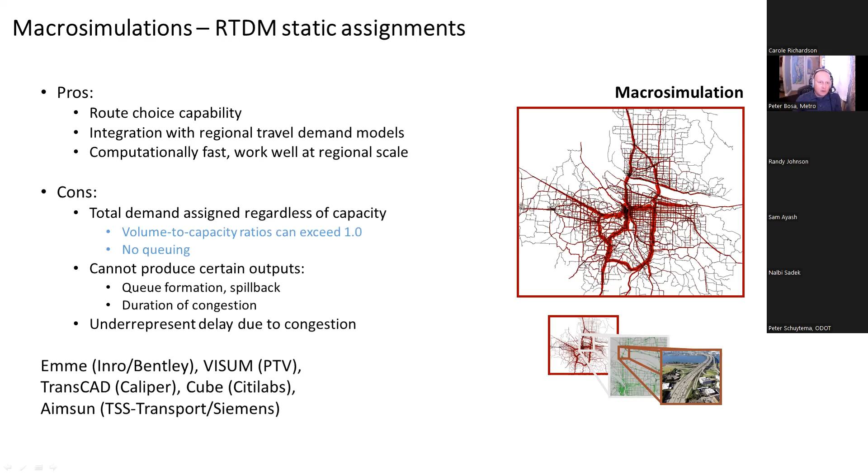At the other end of the spectrum, you have your micro simulations. These are very precise, highly detailed computer simulations. Often the vehicles are almost like agents, modeled individually. They can be assigned specific driver behavior, and they're being simulated in almost real time, so very small fractions of sometimes even sub-second. They're very time consuming to develop and calibrate, taking a lot of time to make sure they're functioning properly. They're computationally very intensive because you're modeling many more single individual objects.

The vehicle paths are often fixed, not always, but the traditional application is you get a set of vehicle paths from something like a macro assignment, and then those paths are fed into the micro simulation, turned into individual vehicles. Then it's left up to the operator to determine how to deal with situations in which the demand coming out of your macro assignment might exceed the capacity capabilities of your facility. So they can sometimes overestimate the amount of congestion on a facility because there's not really that release valve of alternative routes to look at. I'm speaking in generalities here - I know that Chayton would probably raise his hand and say, oh wait, our tool has ways around that. But this is just kind of in general.

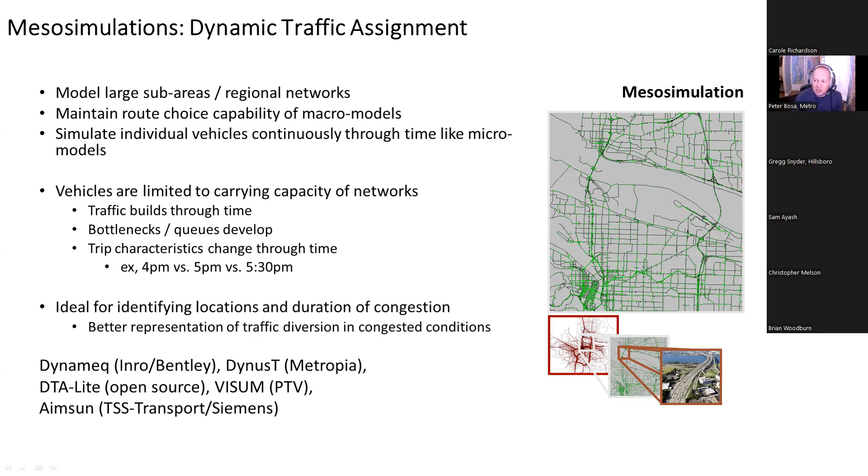And so below is just a list of some of the products that are out there. We've been using Dynameq quite extensively in our region, but I've used all of these other tools that I've listed below, and they all have their advantages. So this isn't by any means a judgment call, it's just that we use Dynameq in our region.

So we've been actively engaged in DTA development here at Metro for over a decade, since about 2010 is when we really got going. We spent a lot of time and resources developing networks, actually all the way down to the lane and intersection level. When we developed our first networks, we were adamant about getting turn pockets correct, turning movements for lane-to-lane turning movements and intersections, the length of turn bays, as much detail as we could possibly get into our large regional networks.

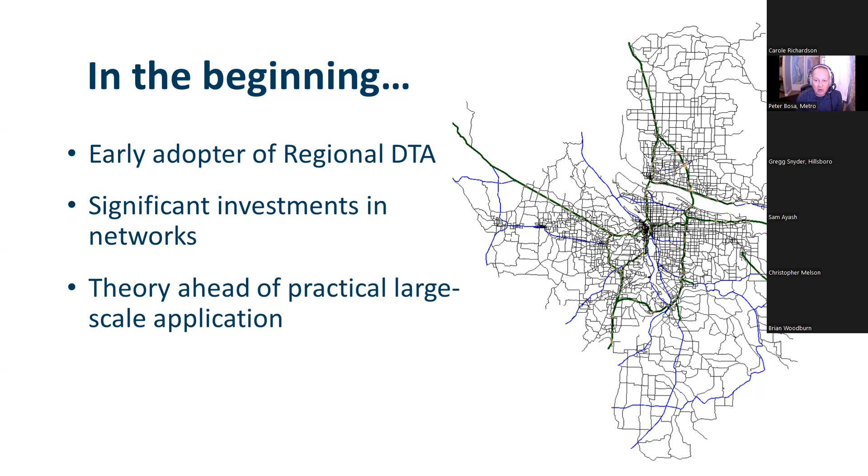Part of this was because there had been this promise for DTA out there for a long time - it's a tool we've wanted to use. Unfortunately, until the last maybe 4 or 5 years, I would say that the promise of DTA exceeded the ability of the tools to function in a manner that was conducive to our planning. So basically what I'm trying to say is that the computational runtimes of these DTAs were significant, and it didn't make them practical to run at a very large scale. There were also some issues behind convergence and all of that, but aside from that, we still found a couple of test cases where we could deploy these tools.

Somebody's unmuted real quick. Okay.

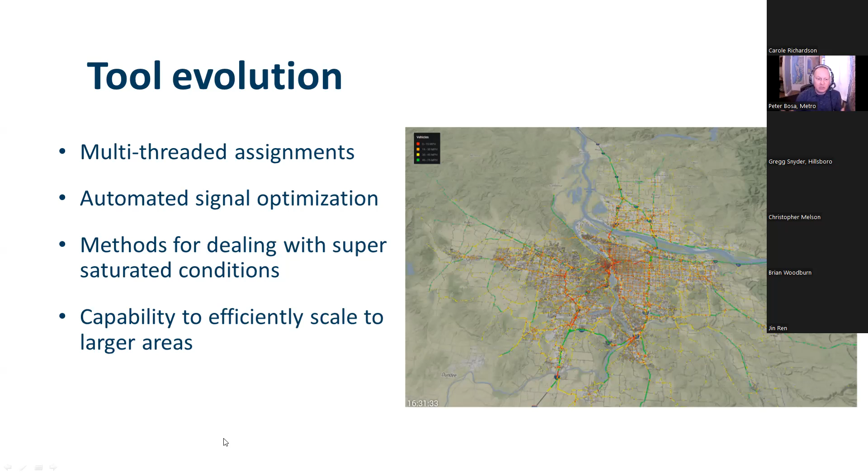Over the last couple of years, our developers have been hard at work. They've improved the assignment capability of their tools. There's multi-threaded assignments now. They took some of the more complicated calibration features like signal optimization and automated those. There's methods now for dealing with supersaturated conditions, so even if your demand exceeds capacity, the tools can massage it in such a way that they can still reach convergence in a relatively reasonable amount of time. And they have the capability now to scale to much larger areas than before.

So we started a project a few years ago trying to figure out the quickest way we could deploy a DTA at a large scale. What are the features that are most important for a DTA? We basically came up with this Quick Launch DTA idea with our friends at INRO, the developers of Dynameq. The whole idea was we wanted to simplify, standardize, and economize - take advantage of repeated applications of our DTA tools. During this project, we learned a couple of key takeaways.

One, it should be at the top: ramp meters are really important across all the tools we've ever tested for DTA. If you want to get your freeways validated well to observable data, you really need your ramp meters in there. They're critical for controlling the flow of traffic onto and off of your freeways.

The presence of signals matters - not a surprise - but the actual timing plans are less important when you're looking at a larger scale. So generic timing plans seem to work fairly well, and you don't have to worry about necessarily getting every signal timing plan correct in your model, which is great.

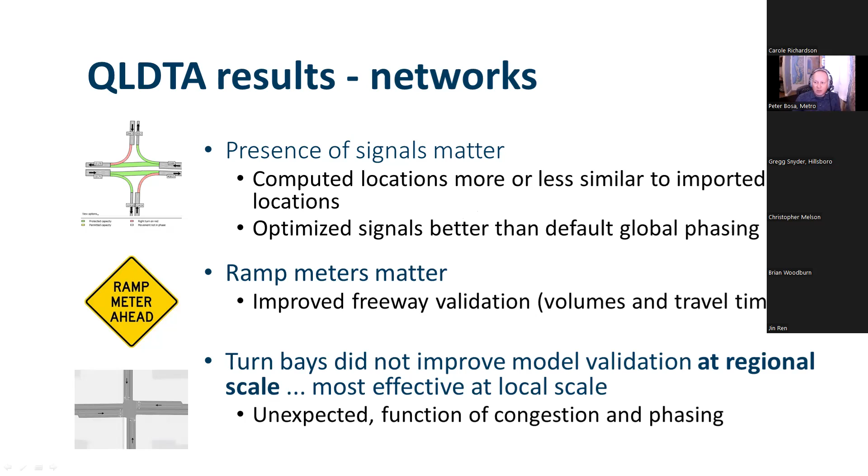We also found that turn-bays didn't really improve our model validation, at least at a higher level. We do have lane-to-lane movements in our model, we do have turn-bay links, but we found that if needed, we could use a tool that basically creates generic turn-bays - standardized, like 100 feet, determine the locations where they should go, put them in. And that seems to work just as well as having an actual representative network, a real-life representative network.

We also did some work around how do we move from our trip-based model, which produces the trip tables that feed the DTA, into the DTA. Our trip-based model is run at the regional level. We knew that the DTA, the final applications, would tend to be at a sub-regional level. Does it make sense to go from a regional trip-based model to a sub-regional scale, to take a sub-area cut of those networks and then move those into DTA?

Or does it make sense to take your regional trip tables, move those to a regional DTA, and then use that to take our sub-area cut? We basically landed on the latter - go from the regional DTA to a sub-area DTA, and I'll talk about that here in a second.

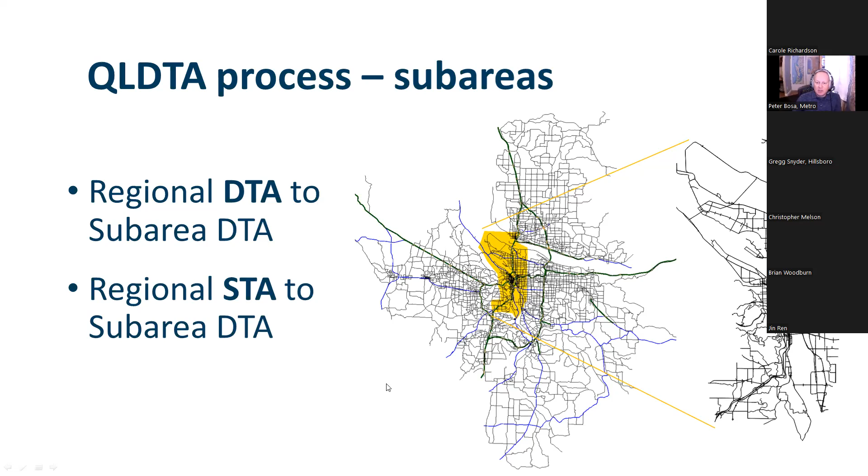So this is an example of an application for the I-205 project. In this project, we start with a regional DTA. We haven't optimized all the signals or anything - we're not too concerned about even validating well at the regional level. Instead, what we're doing is loading all of our static assignment trip tables onto the regional network, and we're just running it to get a capacity constraint on the demand in the network.

This way, when we do our sub-area cut, we know that the demand feeding into the sub-area won't exceed the carrying capacity of the network, and it helps improve our validation of the sub-area later on. There's an efficiency in reducing the demand to the carrying capacity of your network before you start doing your hardcore calibration and validation.

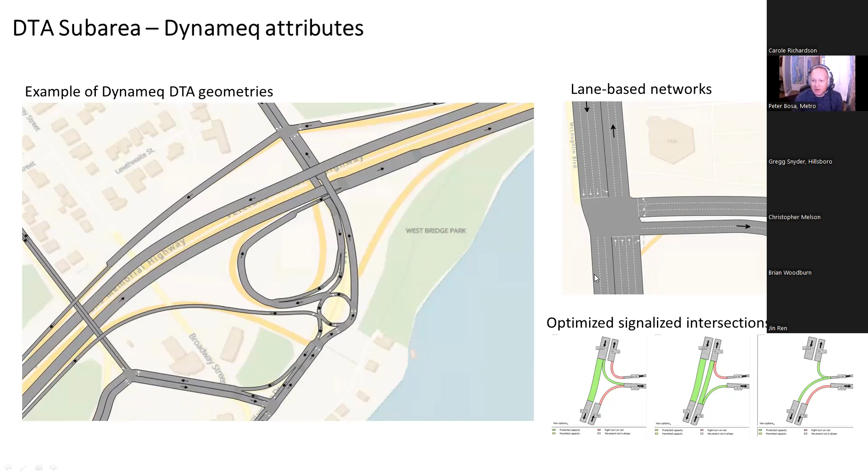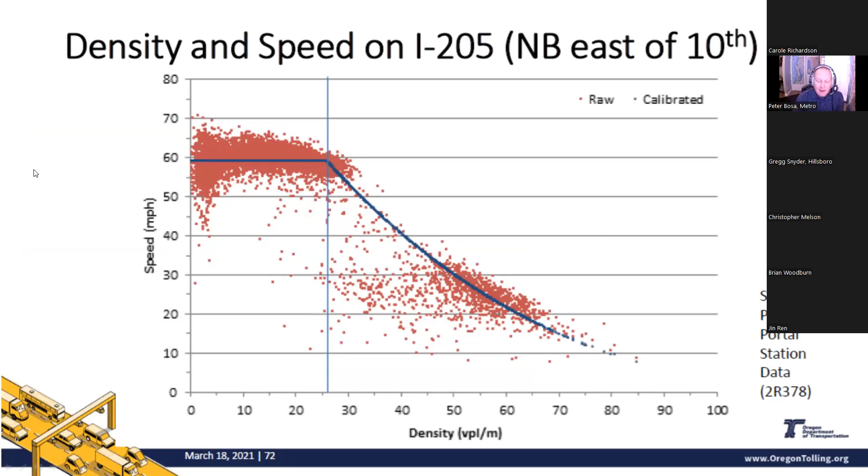Okay, so these next two plots are basically just showing data from portal data on I-205. It shows the relationship between speed and density on your freeway, and volume and speed and flow rate. I put these in here because they show what's happening in real life, and they also show what the DTA is doing. In real life, this is a facility on I-205.

As it fills up with traffic, it can maintain a pretty steady speed up into a certain point. You'll notice our flow rate keeps increasing almost up to 2,000 vehicles per hour per lane, but not quite. I'd say maybe it maxes out at around 1,750, 1,800.

But then we see a huge drop off in speed, and the flow rate starts to decrease. So what's happening here is you're filling up the facility with traffic. Because of that, the congestion is causing friction, slowing vehicles, and as a result, you get less and less vehicles through the corridor.

That's a primary difference between a DTA or micro simulation and your static assignment. The static assignment would show slowing speeds, but your flow would still increase. It doesn't have this ability to decrease flow as your congestion builds. So the DTA is basically capturing this: as you reach a critical mass, your flow rate decreases, your speeds decrease, and that gets represented - we'll see that in a little bit.

So here's some of the characteristics that we tried to validate against. We lifted many of these from the VISSIM protocol that was developed for ODOT, the microsimulation protocol. Because this is a different tool than microsimulation, we're a bit more relaxed, especially when it comes to some of our GEH and other goodness of fit statistics.

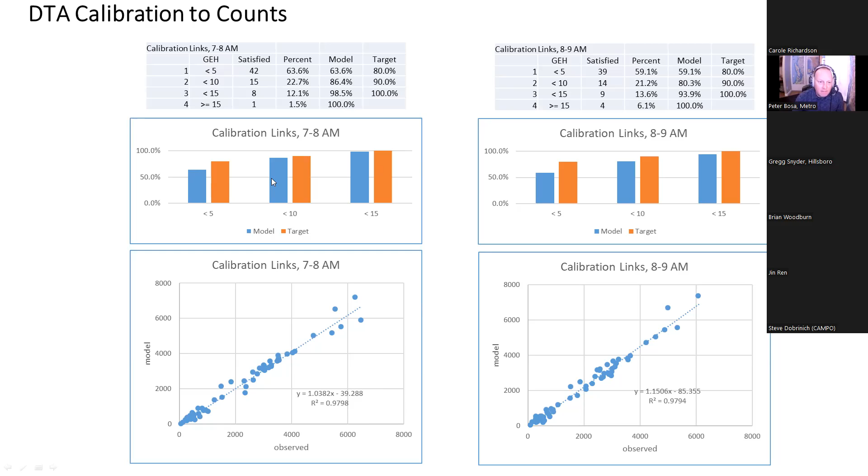But you can see here that we're still trying to go for a pretty good fit, high R squared, low GEHs where possible on counts. The same with the travel time.

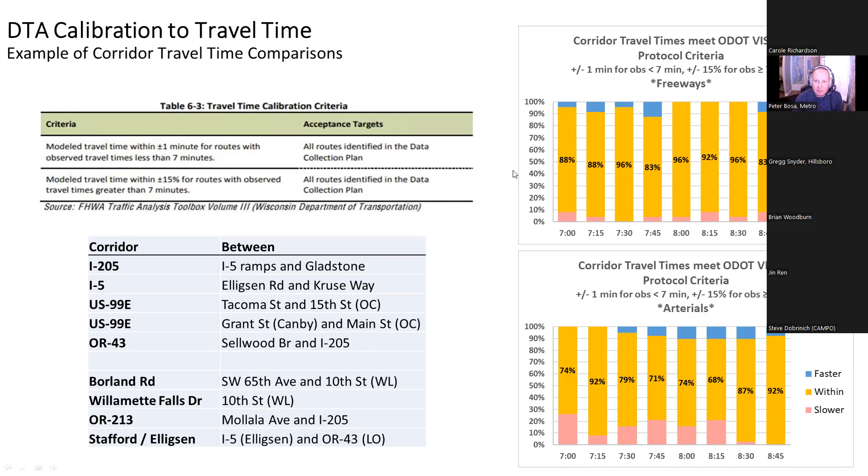This is actually something where we can be a bit more in line with the VISSIM protocols, where we look at the travel time calibration criteria that are set out there. So we try to match the travel times within the DTA to that which we've observed with INRIX or HERE data, and we try to fall within the prescribed ranges - within a minute for travel segments that are 7 minutes or less, and within 15% if it's longer than 7 minutes. Here's an example.

So when we're calibrating our DTA, we're really looking at three things: we're looking at counts, we're looking at travel times, and then we're looking at space-time plots, which show the relationship between speed and volume on your freeway. They're really good at capturing bottleneck locations.

So here, for example, this is I-205 southbound in the AM near the Abernethy Bridge in Oregon City, West Linn. This is the INRIX data. As you can see, as the colors get darker, that means it's slowing. We see a bottleneck occurring right around 7 a.m., extending back almost to 82nd Drive, at least through the 9 a.m. for the AM peak period.

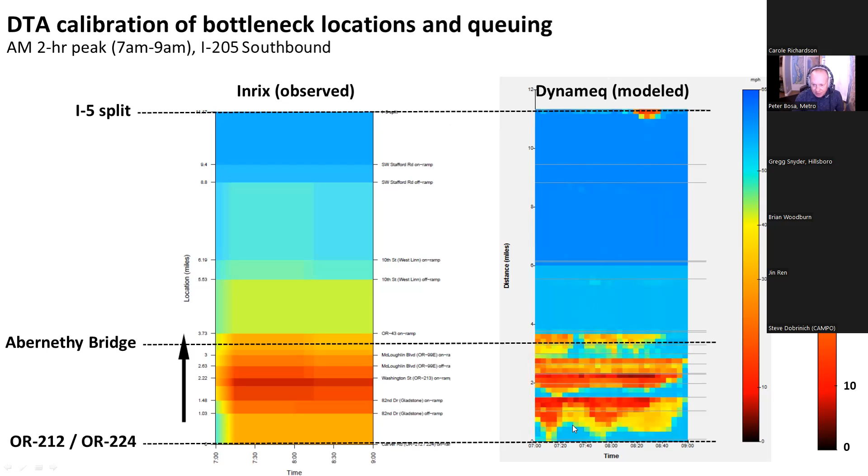We see that here in the dynamic model as well. I think this shows that we've done a pretty good job of calibrating this model so that the bottleneck location is captured, and then the actual shape of the queue spilling back, the extent of the queue, the duration looks very good. This is another example where we feel like the dynamic model is doing the right thing.

And it actually has better resolution than the INRIX data. The INRIX data is much more general, while the dynamic model shows the queue, I think, in higher detail.

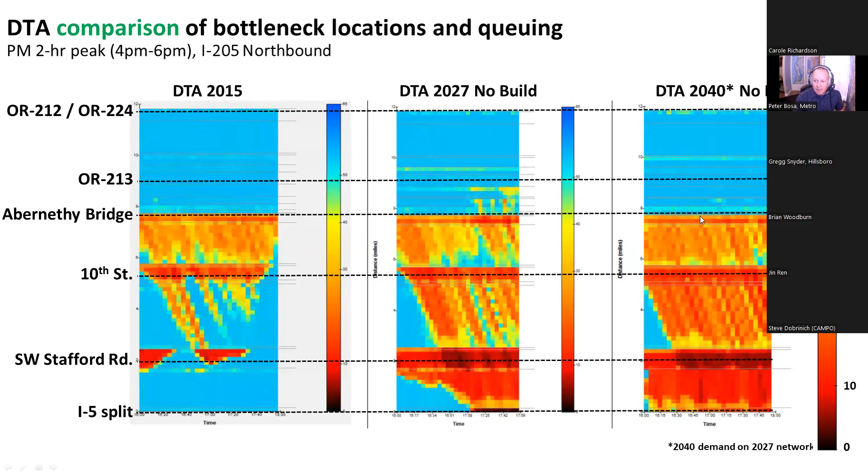And then once you've got your DTA established, you can start doing comparisons. So this is a 2015 base year. We already have congestion at the bridge spilling back in this corridor. By 2027, under a no build scenario, that congestion only gets worse. And by 2040, assuming a no build, we just have complete congestion in this entire corridor.

And here's an example where we have done some analysis with a build scenario. We added capacity in the corridor. As a result, the bottlenecks have been alleviated, and you can see the queuing is gone, with free flow speeds through most of the corridor.

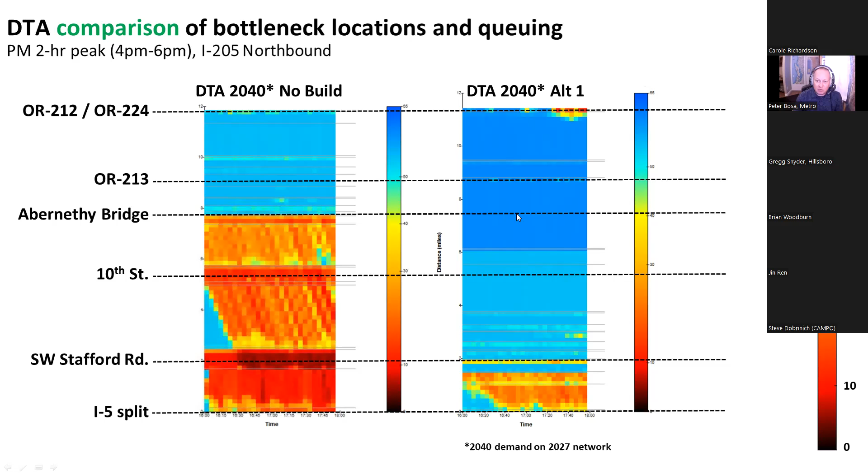If somebody asked me what's the biggest difference between the DTA and static assignment, I would say the biggest differences occur not where you've added capacity and alleviated congestion, but in scenarios where you have a lot of congestion. When there's a lot of congestion, the static assignment will tend to push more vehicles through a corridor and overestimate the speed at which they're traveling.

The DTA, however, is capacity constrained. So what happens in really congested corridors is you get much less throughput. In this example, we're getting about 25% less volume through our no-build scenario.

You can see that our two build scenarios are quite similar between our static assignment and our DTA, because we've added enough capacity that there's no longer bottleneck issues, and both models do a fairly good job modeling that condition. But in the highly congested time period, the DTA is more responsive to congestion. We see much more diversion in our no-build at slower times, longer travel times, slower speeds.

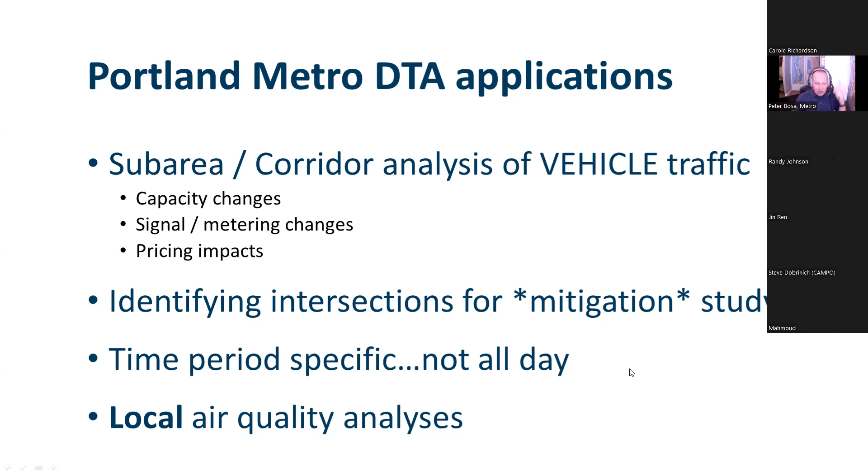Moving into the West Side study we have coming up, we'll be looking at potentially using DTA for local air quality analysis. What we have found right now is it's not practical for full regional implementation. There's no feedback mechanism with the travel demand model, so we're not going to see mode shifts related to the DTA - it's not going to be feeding into that.

There's no transit component to the DTA, so it's more time and resource intensive to establish than our regional travel demand model. There's much more calibration time - it's more akin to a micro simulation than a static assignment when talking about calibration time. You have to calibrate each application of the DTA, and each time period being modeled. This adds time.

And frankly, at the end of the day, this just becomes another tool that supplements the rest of your tools. This is a tool to supplement our regional travel demand model, not replace it.

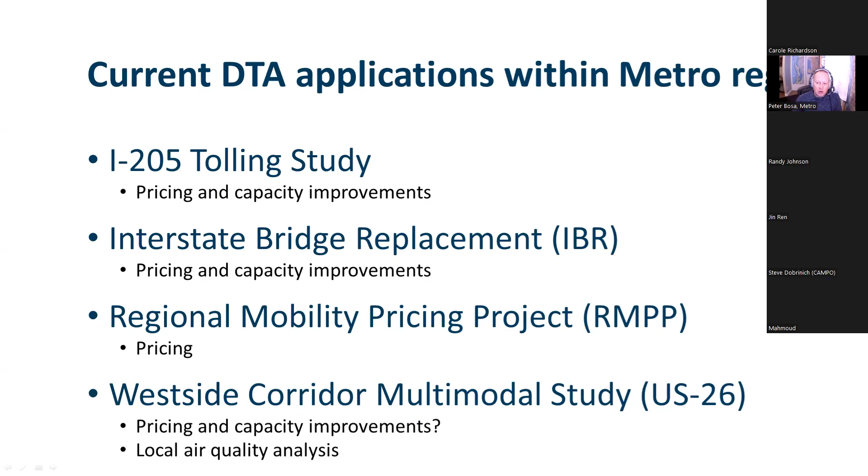A couple of the projects we're using this on: the I-205 study project looking at pricing, the tolling study, the interstate bridge replacement, RMPP - which is a large pricing project - and then the upcoming West Side Corridor multimodal study, which is US 26.

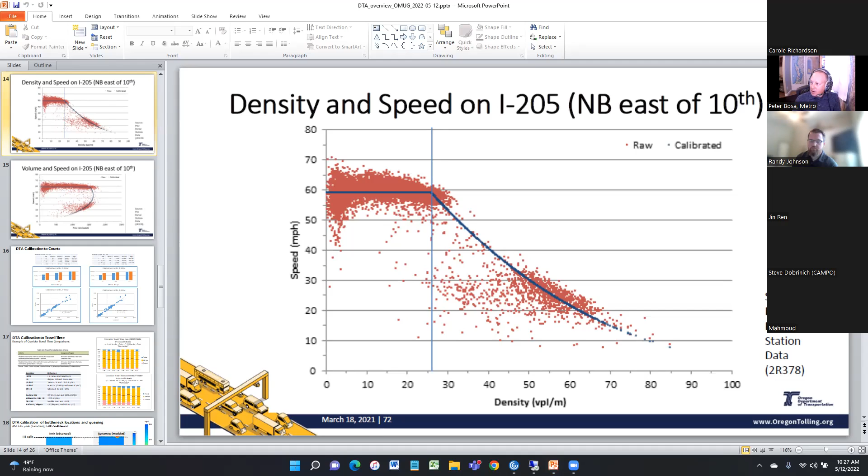Oh, okay, the shape of the speed-flow curve, yeah. So this, I actually have a spreadsheet - that's Peter Bosa's spreadsheet that produced this.

The spreadsheet is excellent because it allows us to look at, section by section, station by station, and create these models. I've found that the flow rates rarely approach 2,000 vehicles per hour per lane, which is the standard flow rate or capacity we use in our models, like on our freeways. After creating these plots for enough portal stations, I think it's safe to say that it's rare to see that type of flow rate in our region. It's led us to reconsider some of the maximum flow rates we'd use, not only in a DTA, but also in our static assignments. I have a spreadsheet that does this stuff - that's a presentation on its own, but it's a very useful tool.

I think that's really important, Peter, and it really goes to show how important local calibration is for these models. We have data down in California showing some of those freeways are pushing 2,200 plus vehicles per hour per lane, so we're certainly not getting that capacity here in the Portland metro region.

Randy asked: do you think that's a geometry issue, a facility issue, or more of a driver behavior issue? I think it's a combination of both. Having driven down there, there's definitely a little more aggression in the driving population than up here. They're not Oregon nice like this, right? Right, I should just label this 'Oregon nice' - lots of space between vehicles.

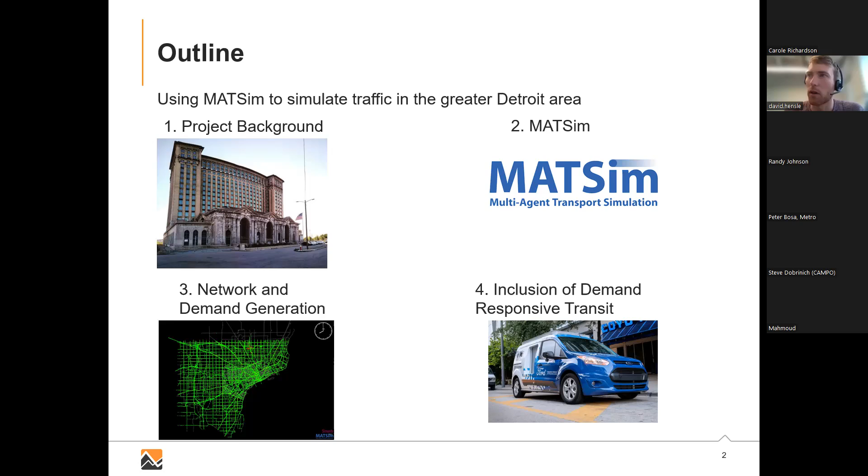The project background: it was a collaborative effort between RSG and ETH Zurich. ETH Zurich is one of the primary developers and users of MatSim, so we leaned on them a lot for MatSim-specific knowledge, and RSG was primarily responsible for a lot of the network and demand development.

The project essentially started with this new, or old, building in the Corktown region of Detroit, just outside downtown. Ford Motors bought this historic building, the Michigan Central Station, a couple of years ago. The idea was to turn this decrepit old historic train station, which used to be the jewel of the community but has since been run down, into a brand new office focusing on autonomous vehicles and Ford's administrative offices. They wanted to understand the impact of adding 5,000 workers or so to this area and how it would affect traffic around the region, and also explore new mobility options like this Uber pooling type service, with an eye towards more autonomous vehicles and ride sharing.

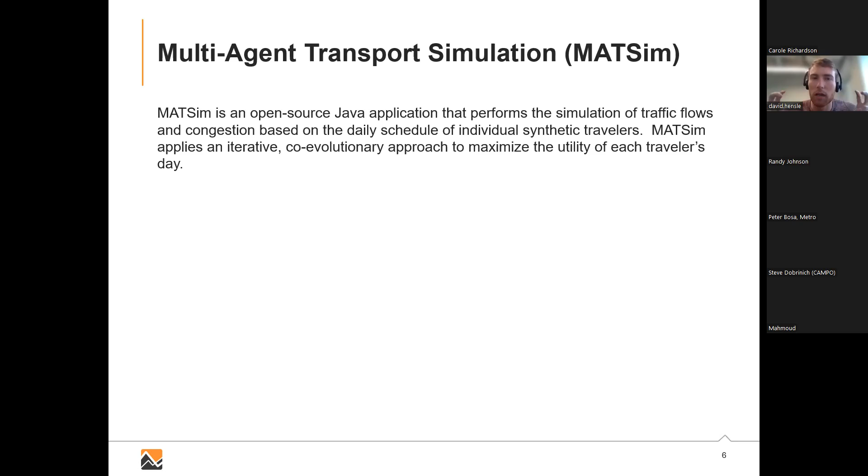Then there's some scoring function that determines how quickly or how well an agent goes from their origin to their destination. Generally, MatSim has the ability to change people's daily patterns to try to reach convergence with a co-evolutionary approach. We didn't really want to allow people to change where they were going or when they were going there. We did allow people to change the route, how they got there, and the mode, what they used to get there. So there's a scoring function, which we limited in this instance, and then there's this replanning loop that comes back, and you run this until you reach some convergence.

And then, of course, we want to do output analysis like traffic volumes and mode choice distribution, things like that.

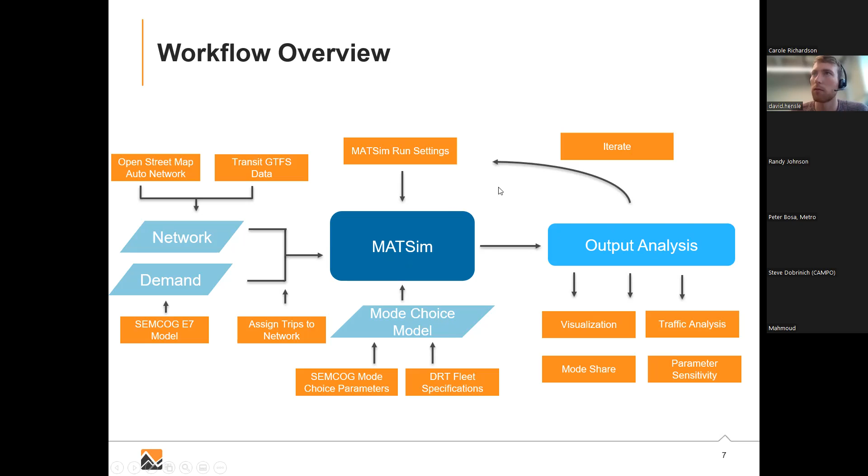So moving on to the demand and network creation. The demand, as I just mentioned, came from the region's trip-based travel demand model, the Southeast Michigan Council of Governments, which is the MPO for this big 7-county region. There's almost 3,000 TAZs in this area, corresponding to 21 million person trips.

We were really only concerned about this Wayne County modeling region here. So that essentially trimmed it down to only about 11.7 million individual MatSim agents. And we distributed them temporally and spatially from the SEMCOG trip-based model onto our MatSim network.

I think it's important to note here that we use the SEMCOG travel demand model because it's already a calibrated and validated model. We didn't really want to try to create a travel demand model from scratch for this whole project. So the idea is to use something that's already been created and used and validated, and that it could be a little bit more easily replicable to other regions that have similar trip-based models.

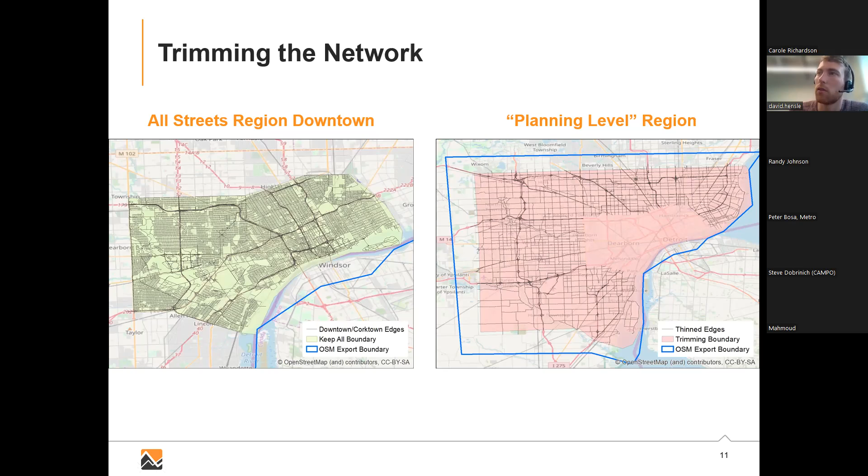And then what we did was we took the SEMCOG planning level network and we trimmed out all the auxiliary streets outside of the downtown region to avoid unnecessary computation time.

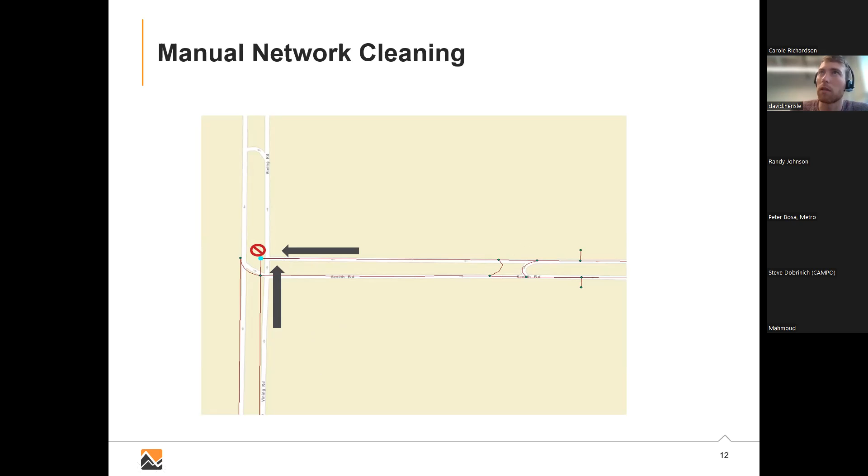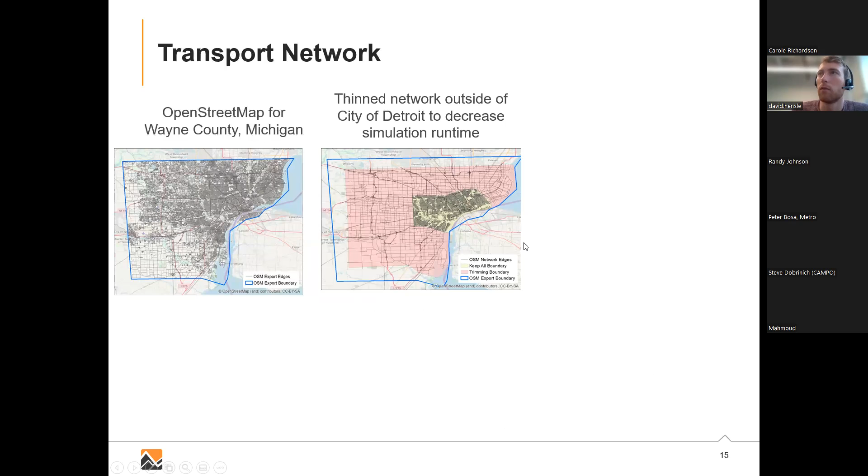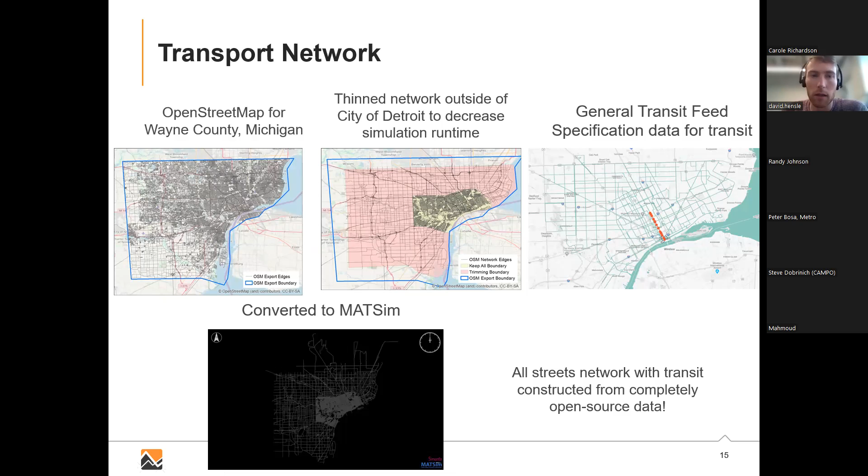So to summarize here, we started with OpenStreetMap for Wayne County. We trimmed it, added some transit to the network, and then converted it into a MatSim format. And we were able to do all of this with open source data and open source tools, which I think is pretty cool.

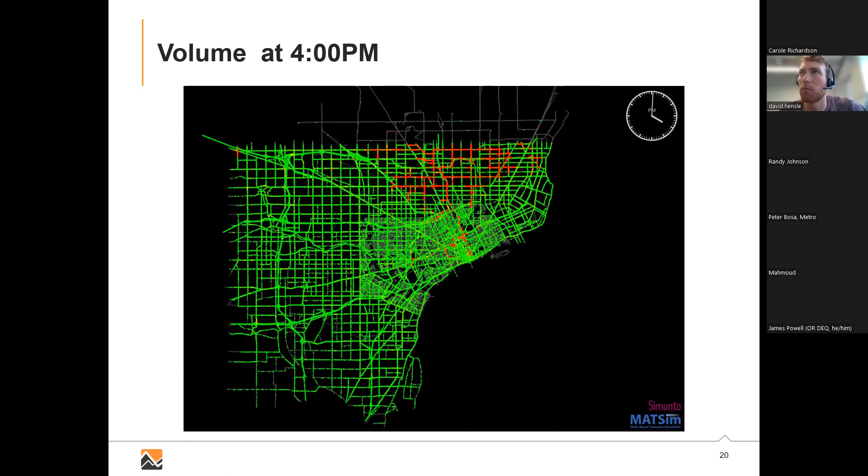And as you zoom through the day, 8 a.m. to 10 a.m., it grows. And then by 1:30, it really grows. And then by the time you're in the PM peak period, it's really spread, and it doesn't get any better by the time 6 o'clock rolls around.

So what this really leads us to is there's generally regions in your development cycle where you have network problems. For example, there's this interchange right here, 8 Mile Road and I-75. And there's this little link, like this one right here, in the network.

In reality, it's 2 lanes, kind of this split lane deal, but it was coded as 1 lane from OpenStreetMap. So here's an example where people are coming off the highway or trying to get on the highway, and this one small tiny little lane backs up, which causes a backup onto the highway, and it just spreads throughout the day. So very small problems in your network can really cause headaches when you're doing scales like this.

So after we sorted out a bunch of those issues, we were able to look more at the demand responsive transit portion. The way that we incorporated this was by using a mode choice model. So we have our usual car mode, some non-motorized modes, and public transit, and then we added an additional demand responsive transit mode here.

The parameters for this mode choice model came from the SEMCOG trip-based model. They include things like in-vehicle time, out-of-vehicle time if you're doing things like walk to transit, walking or biking. We also have some travel costs, auto operating costs or toll costs, and utility terms based on household income and the availability of a vehicle for the household the agent comes from.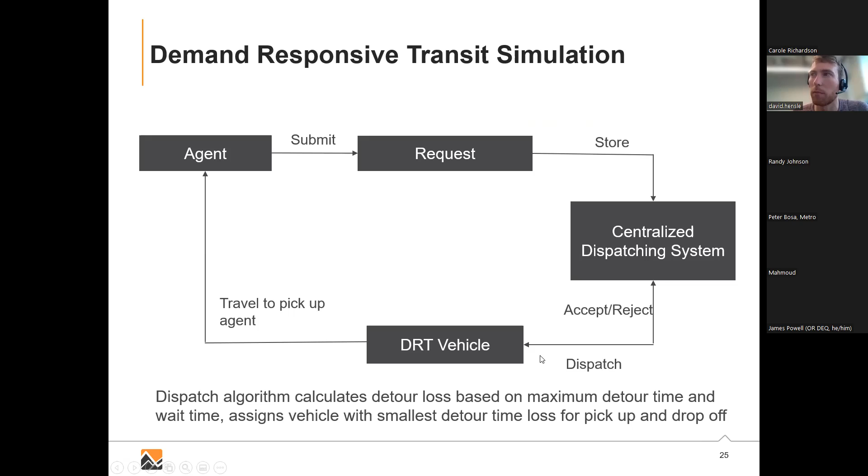So we tried a bunch of different scenarios: multiple different fleets, multiple different vehicle occupancies, the size of the DRT vehicle, and two different fares, $2 and $4, just a flat fare with no distance scaling. We fixed it so the customer was only allowed to wait 15 minutes; if they had to wait more, their request was rejected. If there was more than a 15-minute detour time for the vehicle, it wasn't allowed to pick them up or drop them off. There was also an additional almost 2-minute wait time at each stop.

So as we go through our simulations, these plots show the number of travelers, the number of people who requested rides, and the number of vehicles in the fleet, with two colors: the $2 fare is blue and the $4 fare is gray. The lines up here are the total requests. For a fleet of 100 vehicles, there are 35,000 requests, but only 5,000 people actually got served, so the rejection rate is extremely high.

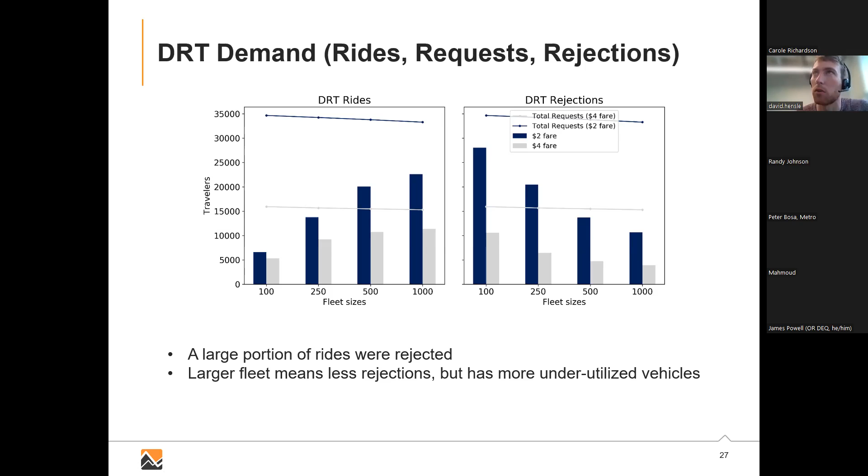Also, as a function of the low density in the Wayne County region, the occupancy for these vehicle rides was pretty low. You can see the amount of deadheading of these vehicles here. Most of the passenger distance is with one passenger in the vehicle, with very small amounts of ride sharing with two, and four is pretty much non-existent. There are a couple cases where a few vehicles had up to 3 people in them.

We also took a look at wait time, specifically the average wait time of the fleet. It's not very sensitive to fare, but it is, of course, sensitive to the size of the fleet. As the size of the fleet goes down, the wait time goes up, because the density of vehicles on the network that can pick up and drop you off decreases.

To summarize, most of the DRT trip ridership comes from the car mode share. That's where we saw a huge shift, people switching from car to this DRT mode. That's probably not surprising, considering most people in the Detroit region use cars anyway. It's a very low transit share area.

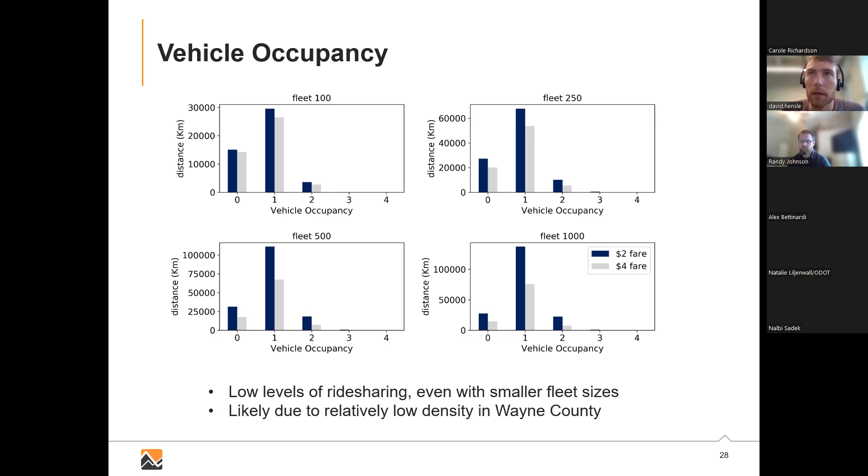I don't know, yeah, so that was kind of the point I was making about it being cool to integrate this with the regional travel demand model. If this becomes a mode and there's more available and people are willing to take it, does that mean less people are going to own cars? That's not something that was explored as part of this project, if that answers your question.

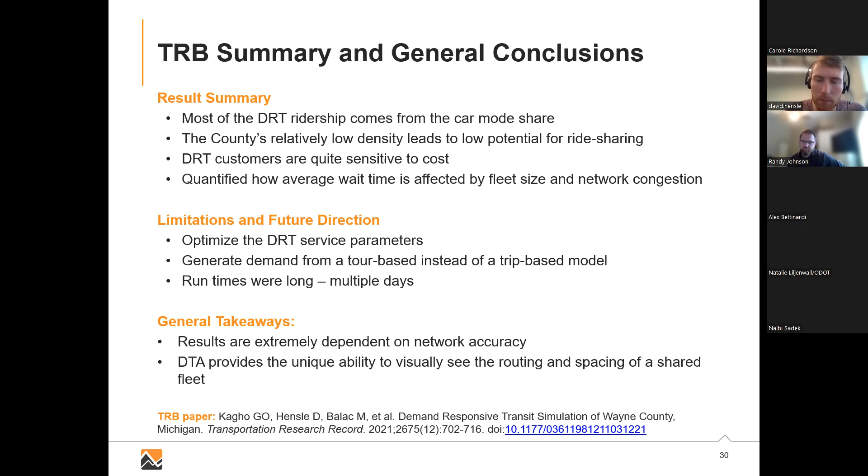Sure, but was the demand—that makes sense. So the ownership is somewhat static, but was the amount of shifting to this new mode a function of... was there a variable tested in how much the ride costs the chooser?

Yeah, right, so that's this fare cost here. If you look at the mode choice model, this travel cost—the fare would come into this travel cost if you're in the demand responsive transit portion, or if you're in public transit, it'd be the fare of the transit vehicle. Or if you're in a car, we have some auto operating cost parameter that comes in there as well.

Got it, thanks, I just missed the slide. Thanks so much. Okay, and then final question here before we jump to the next presentation from Peter Bosa.

Did you validate the MATSim all-day network results with observable data? Yeah, so we took the counts that were from the SEMCOG model, or the SEMCOG region, and we linked them onto the network, and we did some count analysis as a function of time of day. That was kind of the main validation plots we used, and we also wanted to make sure the mode choice model was validated as well, based on the mode shares in the SEMCOG region.

Just a quick follow-up, David, thank you for answering that. Did you have to do some sort of demand adjustment for MATSim? Or did you find that putting in the raw demand from the SEMCOG model, you were able to match—you validate pretty well against the counts?

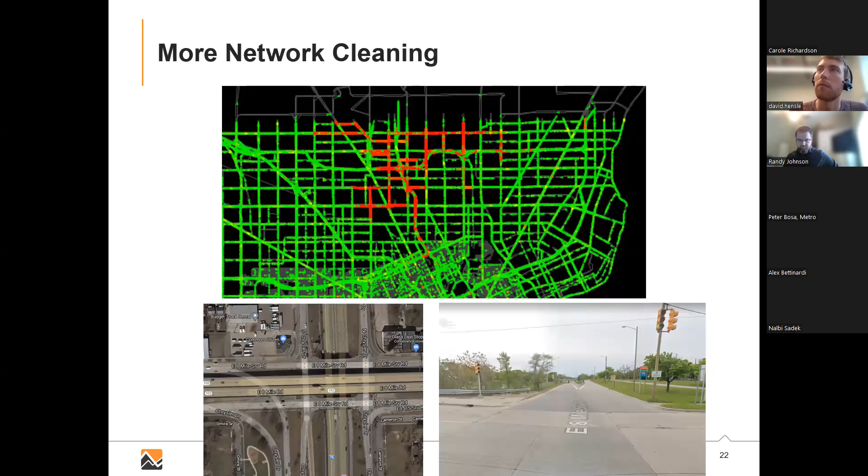Yeah, I mean that's a great question. I think matching the counts was more about the level of congestion, which had more to do with the network cleaning. In terms of the demand, I don't think I have a slide talking about the demand a whole lot, but this was tricky because the trip-based model has very defined time of day periods, and if we want to be completely consistent with the trip-based model, which we did, we wanted to stay with that.

There's these discontinuities that happen at these time of day periods where, from the midday period to the PM peak period for example, you have this spike in demand. Even if we distribute people in a way that makes sense temporally on the network, you still have this discontinuity because a whole lot more people show up on the network at 4 p.m. That was a challenge for us, and it wasn't necessarily resolved. So if you were to look at individual half-hour time periods on the network, the validation might not look as great as if you were to look at the whole day.

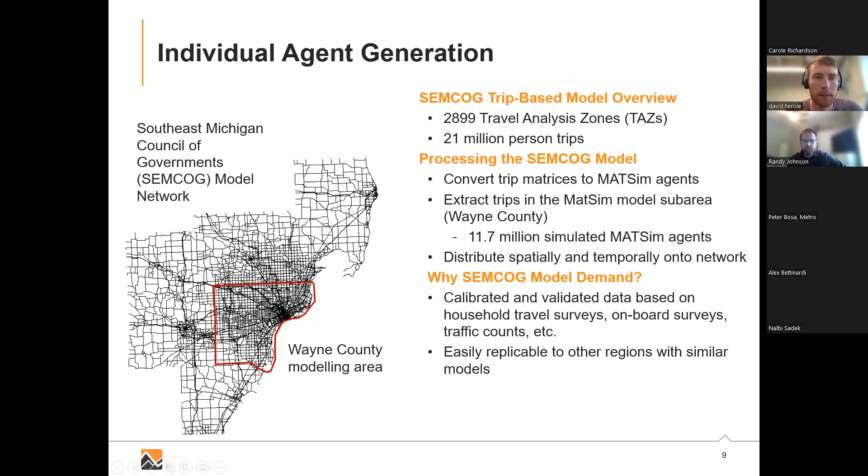Our presentation is going to be on the macro side of meso modeling, a DTA-based assignment case study in Hillsboro, Oregon. I'm Randy Johnson, Senior Transportation Engineer at DKS. I lead our multi-resolution modeling discipline group. I'm also co-chair for the local ITE Oregon ITE SimCap Group, which is co-sponsoring this event. Feel free to reach out to me if you have questions about SimCap and want to learn more about the events we have coming up.

I'm also a member of the TRB Simulation Committee. I'll be kicking off this presentation with a little background on the model development in Hillsboro and what this set of tools is. Then Kayla will present on the actual project applications. Kayla is a transportation engineer with DKS in our Portland office. She does the full gamut of multi-resolution modeling from macro, meso, and micro, and really likes working on projects with a focus on multimodal solutions.

All right, if I can get my slide to advance here. So, multi-resolution modeling, where does DTA fit in? Peter and David talked specifically about the DTA applications. Peter provided a bit of an overview of the macro, meso, micro.

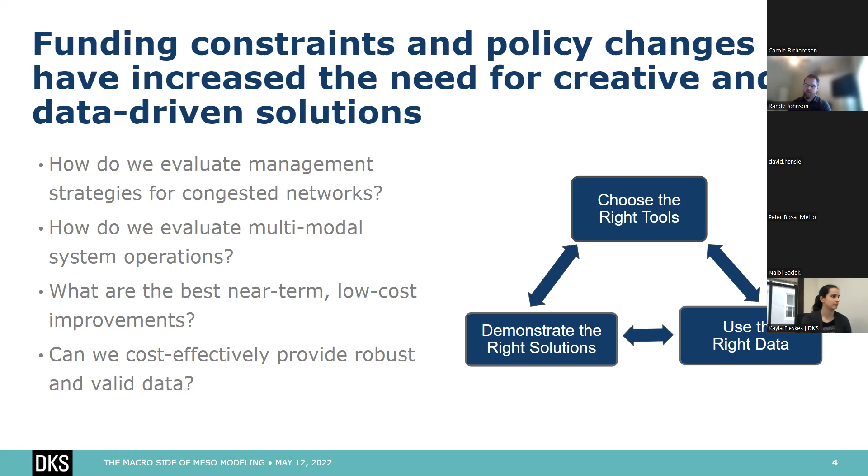The important thing here is choosing the right tools for the project application, which also means getting the right data to support those tools. With increasing constraints on funding and changing policy, we're having to be more creative in the solutions we develop, and we need strong data to support those. So how do we manage our systems when we have limited funding, limited right of way, and want to make sure we're making the best investment of those dollars? Choosing the right tools is an important aspect here.

I'm not going to go too much into the multi-res overview. Peter did a pretty good job in the first presentation, but there are many tools with many different needs, different software packages for each of these scales. It's important to know the benefits, pros and cons, and limitations of each of these software packages, and maybe what combination of tools you'd want to include.

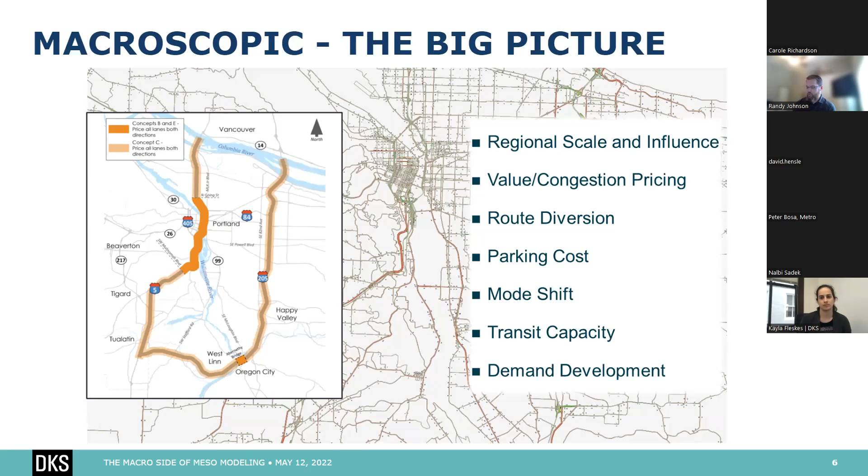Recap: the macro side, generally referred to as the regional travel demand model, is at that regional scale and influence. Applications include congestion pricing, route diversion, parking cost, mode shift, transit capacity, demand development—a whole range of different applications. But as Peter mentioned, it's not necessarily capacity constrained the way a mesoscopic model is. Mesoscopic can cover a fairly large sub area—still challenging to do at full regional scale, though there are a few applications where that's being done. Small to medium sub areas are quite common applications.

Now we're getting closer to simulation, where we could adjust driver behavior and have simplified junction control, dynamic traffic assignment over more discrete time periods. Since we're actually capacity constrained, we get more effective evaluation of something like route diversion. The dynamic examples presented were lane-based DTA, but products like DynusT are link-based DTA, a slightly simplified version. These are all great applications for queue spillback between intersections, understanding peak spreading impacts, or how a project may reduce hours of congestion. Ultimately, you get the benefit of faster runtime over micro simulation.

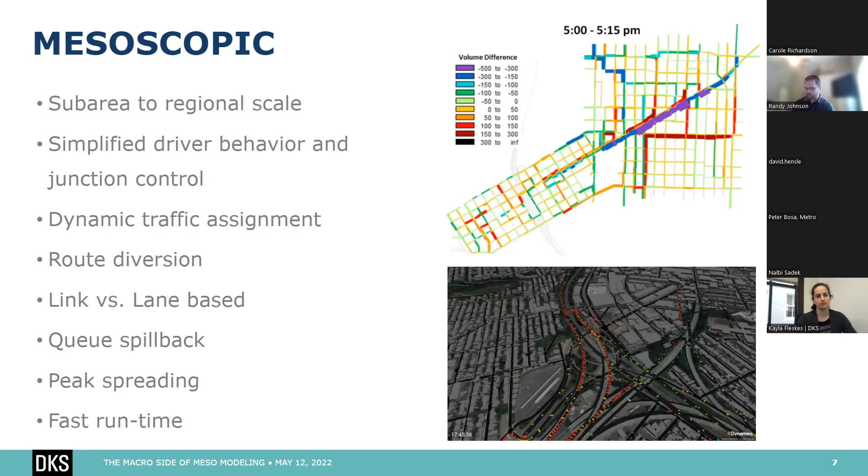The concept of multi-resolution modeling here is a combination of these tools. There's a whole variety of approaches you can take. If you're doing a detailed operations analysis or a corridor study, you might go straight from macro to micro, with some post-processing for volume development—a very traditional approach. With the Hillsboro example we're going to present, we're inserting a meso step in the middle to introduce more refined assignment and more detailed loading of the network.

You could even go straight from macro to meso. That's more the application that Metro is doing with congestion pricing. We don't see it too much yet, but doing the full macro, meso, micro, getting that feedback loop back up the resolution, whether into a meso model or all the way back into the demand model. So there's a variety of different combinations you can do, understanding the limitations and benefits of the different tools, and choosing the one that best fits your particular project application.

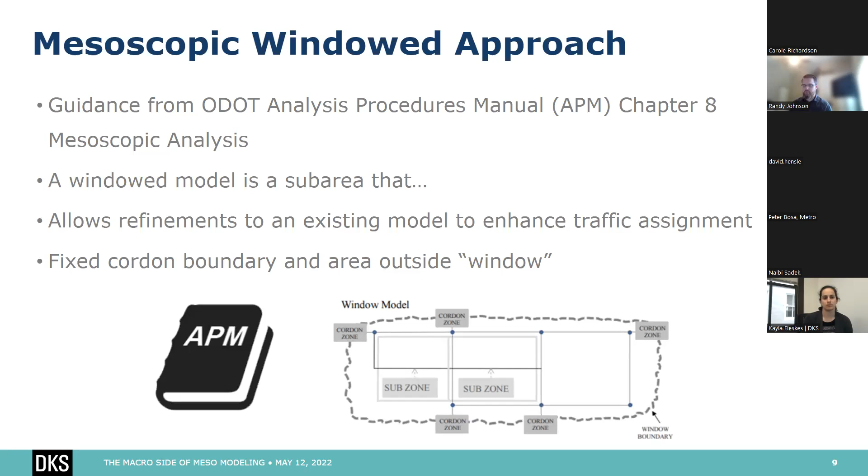So in that meso world, there's more than just dynamic traffic assignment. The ODOT APM has a chapter on mesoscopic modeling, which is really more focused on a windowed approach - more of a detailed sub-area analysis. With that, you basically enhance the network, cutting out a sub-area so you have a fixed cordon boundary, so demand going in and out remains sort of fixed.

Generally, a lot of the regional demand models are pretty coarse in their network. So this process generally involves adding some additional network connectivity. Sometimes it means disaggregating zones. Other times you're just simply refining the connector loading and maybe even the shares of those connectors in terms of getting the right demand to the right locations in the network. That's important when you're ultimately focused on more of an operations-based model.

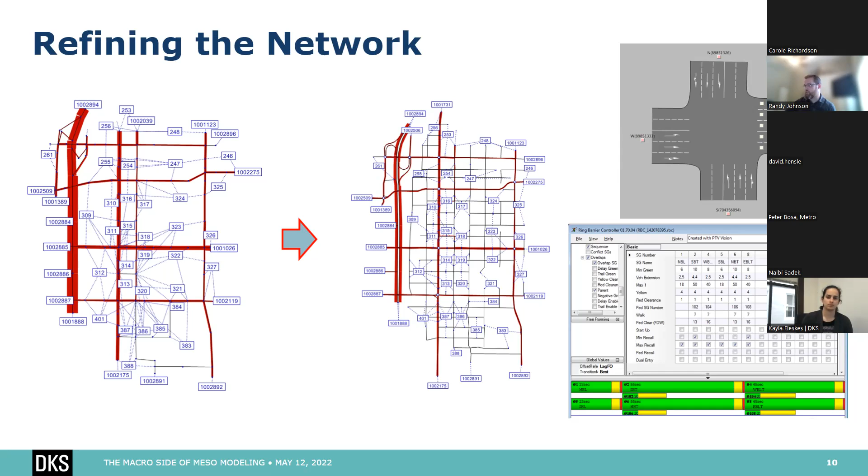And then for our next steps and applications, we're really focusing on operations. So we're adding in additional network detail. We're coding, similar to what you would do in a dynamic model, the individual lanes, but we're also coding in the signal timing as well. So that's going to allow us to do two things here.

One, we have all the inputs for geometry, signal timing, volume. Now we could basically do HCM analysis on the fly. That'll allow us to get our level of service, volume to capacity ratios. As we run through our projects, run different scenarios and alternatives, we could see the immediate results without having to then export, go into a tool like Synchro or HCS and process the information externally. So it's all sort of integrated. The benefit is we're actually using that HCM calculation as part of our volume delay function or impedance model in the assignment itself.

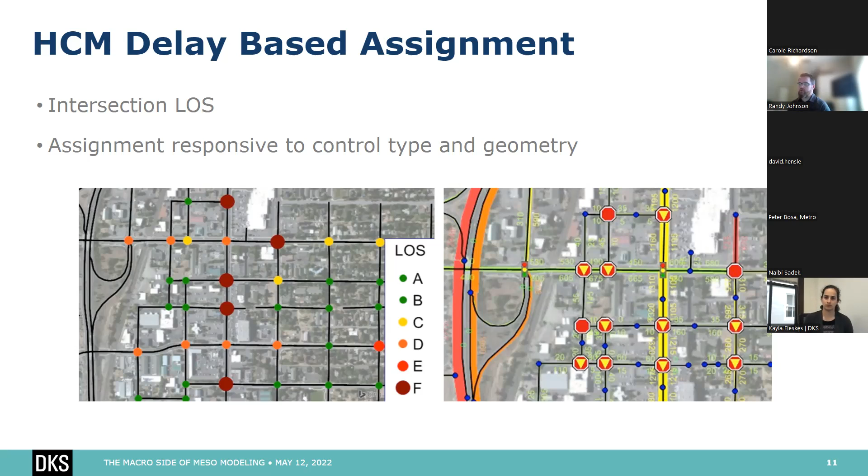So the assignment is responsive - if we add an additional lane or change the control type from an all-way stop to a signal, that delay is going to go down and it'll pull more demand in there. So while not a true dynamic assignment model, you're going to get a more refined assignment based on the operation characteristics of the network. And that's the process that we applied here in Hillsboro.

Hillsboro is actually a pretty early adopter in this. I've been with DKS for coming up on 9 years, and I was with PTV for about another 9 years before that. We started on the downtown Hillsboro modeling probably 2005, 2006. And we've used this same set of models, refined over time, for about half a dozen projects in the downtown area, from looking at street vacations to conversions from one-way to two-way streets.

Some regional impacts too. And we have 2 projects going on right now that Kayla will be covering in detail - looking at adding a couplet, as well as refining and modernizing an existing couplet to add more multimodal facilities and improve pedestrian connectivity. But you can see here, this is what the regional model looks like, how it's reflected in the downtown Hillsboro area. We've added in more local connectivity.

We disaggregated the zones down to the block level. That allowed the city to go through and do some sensitivity testing in terms of different development scenarios, and basically create a build-out scenario.

Other unique characteristics we have within Hillsboro: we have some major regional through routes, we have a grid network, we also have light rail that comes through with frequent preemptions, and we have queue spillback between multiple intersections with short blocks. So traffic is very dynamic in how it reacts to congestion. You can easily kind of go around the block to get around a temporary queue buildup from a rail preemption, or stair-step through the network to get around that several-block queue from a traffic signal.

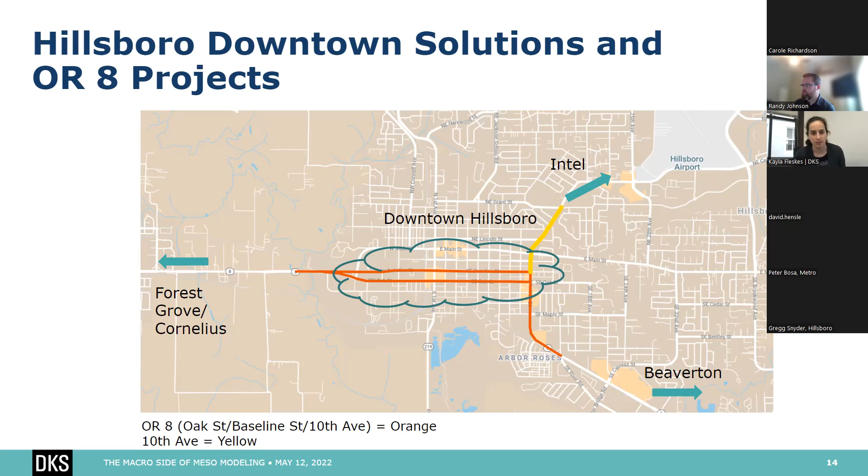We'll move to the next slide, Randy.

So as part of this project, we're looking at alternatives to going from that five to seven lane corridor. Some of the key objectives we wanted to understand with this multi-resolution approach is the regional routing aspect—if we have all these regional trips going through downtown Hillsboro, are there opportunities to route those trips off of the downtown facilities?

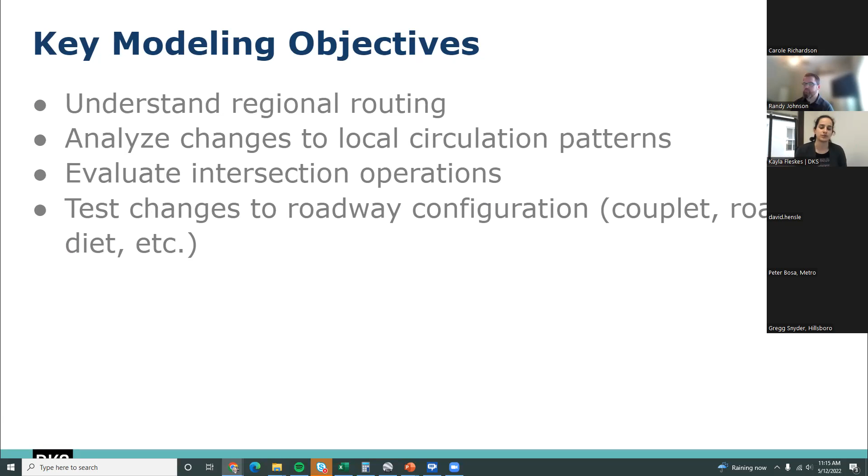We also looked at changes to local circulation patterns, understanding that the city's grid today is a one-way network around Fifth Avenue downtown. If there are changes to local circulation patterns that could reduce out-of-direction travel and improve connectivity for bikes, what impact would that have on traffic operations? As Randy pointed out, the meso model, the way we coded it, allowed us to look at intersection operation level detail—HCM operations—and really understand how we could test changes to the roadway configuration to see if there were alternatives to that seven-lane widening.

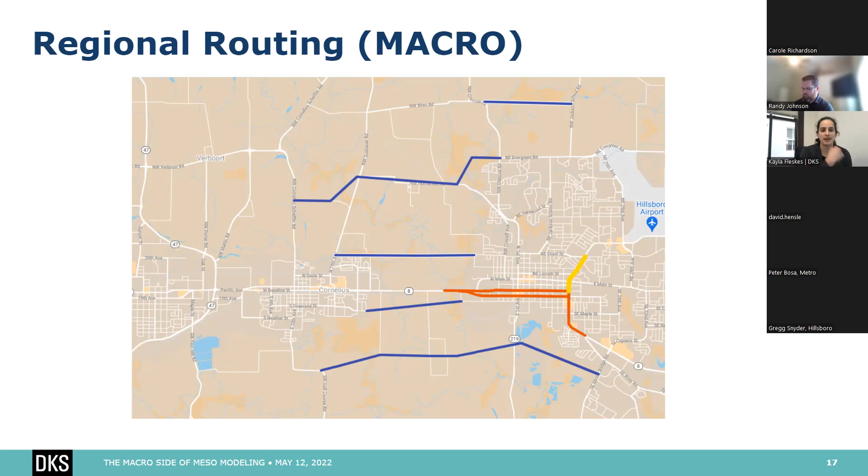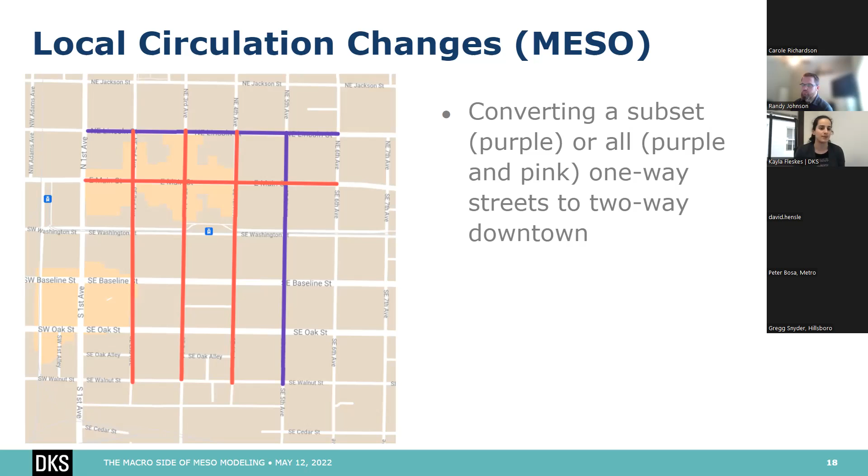Again, the other application for the meso model was really looking at intersection operations. We were able to forecast future traffic volumes using that disaggregated zone structure and analyze our HCM6 operations. Like Randy mentioned, you can really do that on the fly as well, so as you're testing changes you can very quickly see the impacts rather than bringing it into a different software platform.

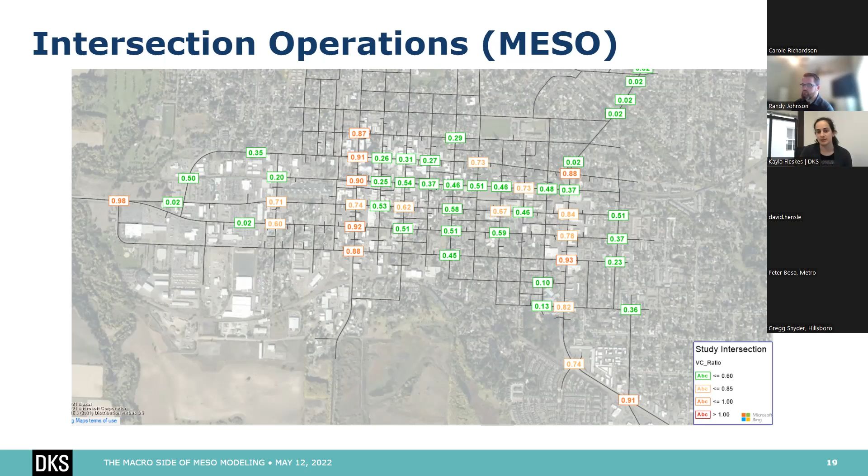This also was what we used to get that routing into the micro simulation model, like Randy mentioned. So finally, I've got a video here that we put together to show the micro simulation side of things. Like Randy mentioned, we wanted to really understand the impact of spillbacks between intersections in this congested model, understand the impacts of the light rail crossings, and still have the flexibility to do some localized dynamic routing without going to the time and effort of getting the truly dynamic assignment. That localized routing did allow us to have that finer level of time intervals, like Randy mentioned.

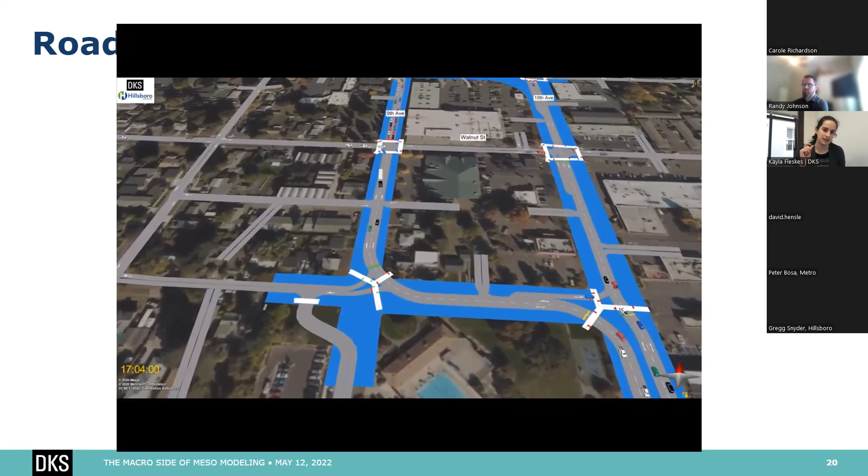So the exciting thing, like Randy pointed out, is putting development cost into tools like this. He's been working with these models for quite a while now, since 2005, 2006, and we still have additional applications that we'll be using these models for.

One of the outcomes of this project is going to be selecting a locally preferred alternative, and ideally a TSP amendment so that we can recommend more unique concepts. This is a couplet concept here for 9th and 10th Avenue being shown on the screen, to amend the TSP and not have that 5 to 7 lane widening impact. This model will also be used in part for some analysis we're doing on TV Highway, looking at BRT operations. So those are some next steps for these models in this process.

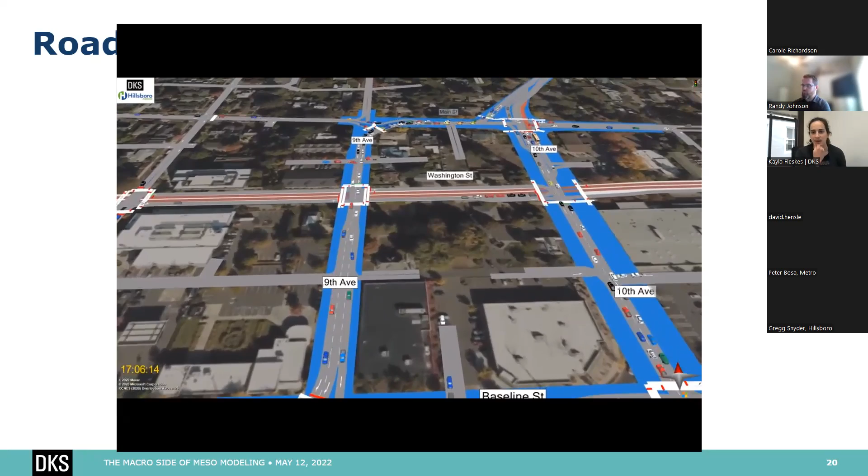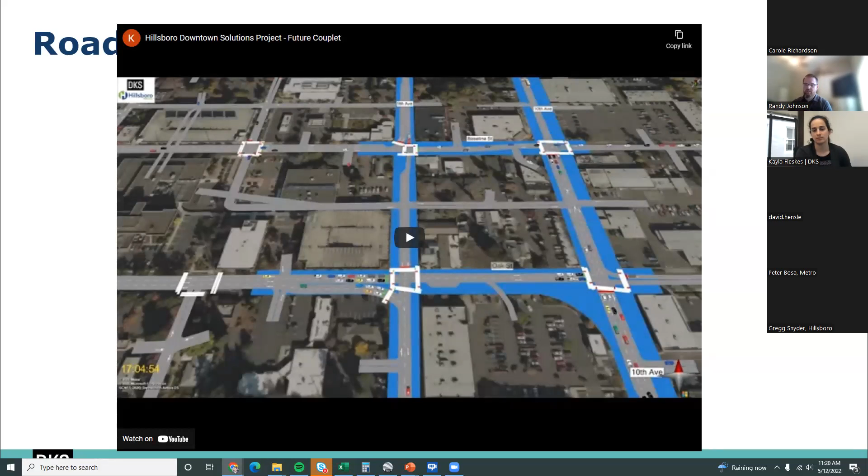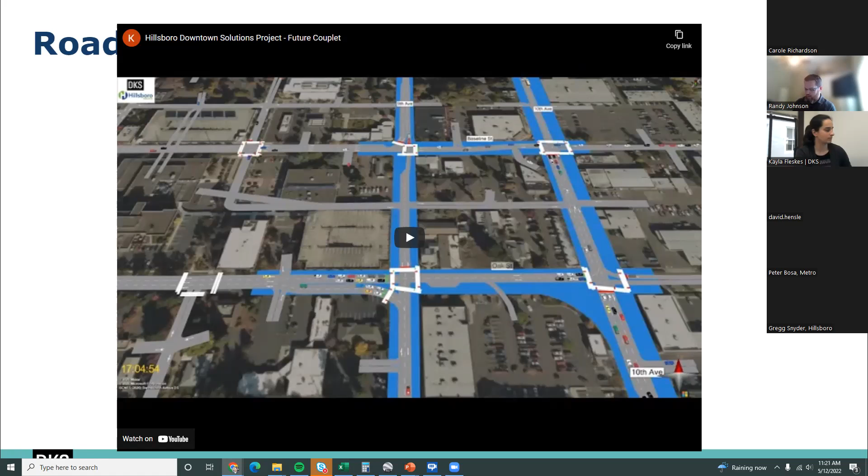Awesome, thank you. Just to point out on this example, all that blue is basically area that can be reclaimed for future placemaking. So what was in an older transportation plan of going from an existing 5-6 lane to a 7+ lane facility, wiping out a lot of right of way and existing businesses—a lot of communities are kind of going away from couplets. This particular case, given the unique funnel of regional traffic through the downtown, actually allows the city to create a better place along 10th Avenue, going instead down to 2 to 3 lanes, adding on-street parking, bike facilities, and some additional amenities. So really demonstrating that through the operations and modeling process here.

So just a quick overview of the benefits of the multi-resolution process. It's efficient and more realistic on the demand development side. Typically, when you're taking future demand out of a travel demand model, there's a lot of post-processing needed to get it to that project level. Here we're effectively doing that directly within the meso step.

The ICA-based assignment provides more realistic routes than a macro model, with a lower level of calibration needed than DTA typically requires. There's a lot of benefit you could get simply from that, like the title of the presentation stated, the macro side of meso. This even supports integration with DTA tools, so you could certainly swap in dynamic assignment if you're using a different software package across the different resolutions.

The meso to micro approach also saves time on network development when you're doing the export from the meso to the micro. A big thing here is one meso model can support multiple projects, so it's not a one and done. We've used this for over 6 projects over a span of 15 years, and we've had to do some updating here and there, but there's been a lot of economies of scale and savings there.

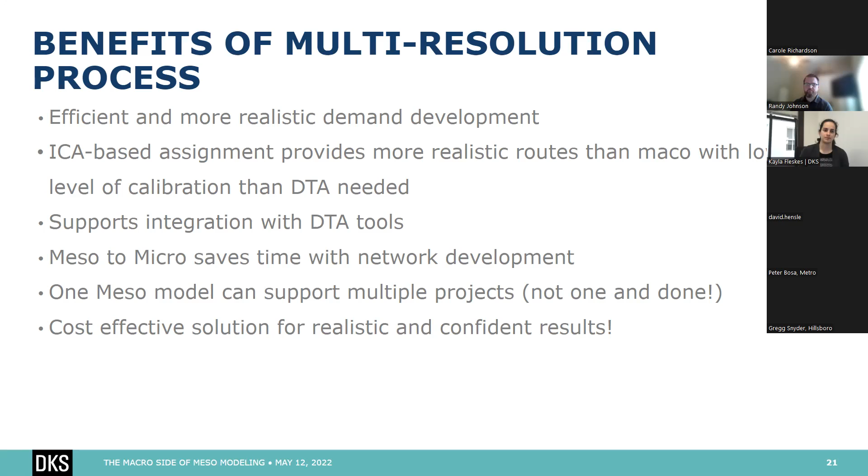Randy, this is Peter. I have a quick question. Yeah, for you or Kayla. How much difference did you find the signal timing plans make at the meso scale in your model? Are they as impactful in the meso model as they are in the micro simulation? Are they less impactful? Did you find that if you didn't have the actual timing plans in place, did you get markedly different model results in your meso model?

I would say it really depends on the details of the specific network. In one case on Lincoln, just north of the downtown area, where that ties into Cornell, the route Kayla showed going up towards Intel and North Hillsboro, when we went from an unsignalized two-way stop controlled intersection to a signalized intersection there, that actually pulled quite a bit of traffic, just because the alternate routes being used before were fairly congested. So again, it depends on the network specifics, but it can make a pretty substantial difference.

Similarly, because of the grid structure through downtown, there were definitely a couple locations where some minor tweaks in intersection signal timing would impact some of the routing choices with the ICA assignment.

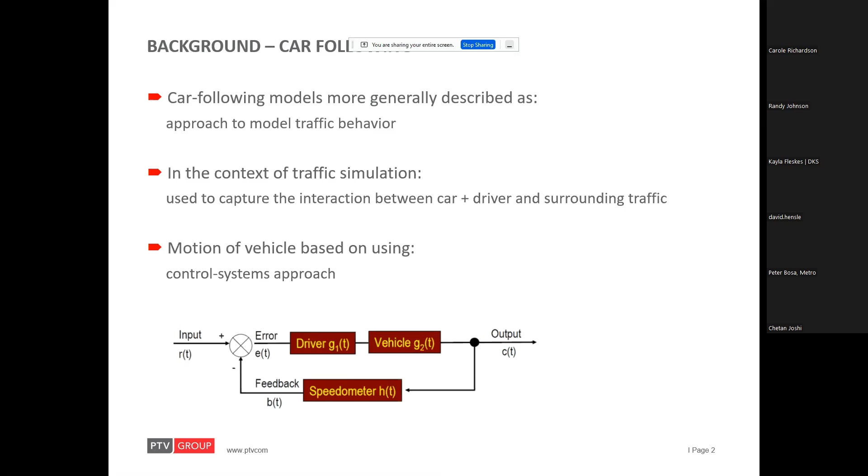In traffic stream flows, there are typically two types of traffic stream flow models. One is a single regime model, so in this kind of model, the same model is used for congested and uncongested flow regimes. This is more typical of earlier generations of models. Some of the more known models for the single regime case are Greenshields model, Greenberg model, the model by Drew and Eddie, and so forth.

Multi-regime models are different in that there is a certain critical capacity or saturation rate, and based on certain internal rules, it's typically modeling the flow in two regimes. One is the free regime, where there is no congestion, so it's essentially the free flow regime. Then there is a congested regime where a different following model is applied. It was developed to overcome some limitations of the single regime models. Examples of multi-regime models include the Wiedemann 99 and 74 models used in VISSIM, Gipps model, which you might see in TransModeler and such, and then Pipes model, which is more generally the linear or simplified model, which you might see in CORSIM, FRESIM, and so forth.

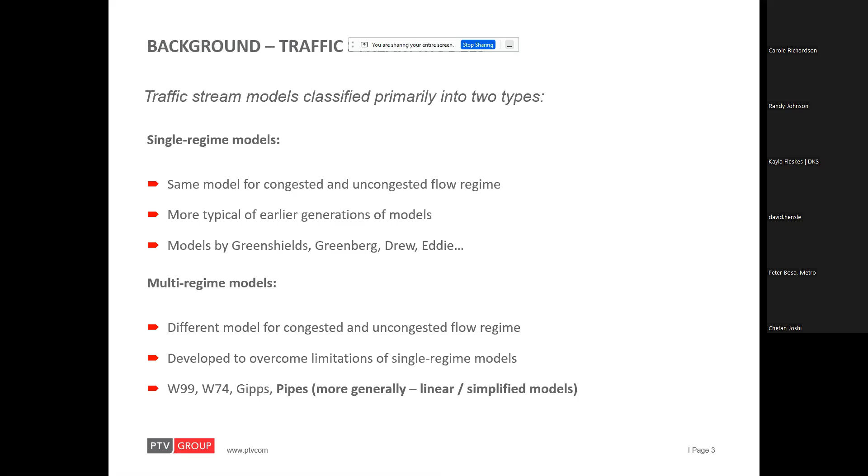One of our objectives was to calibrate the simplified car following model methodically with data sources that are more generally available. For example, ATR like loop detector dumps and so forth, and use that macroscopic data to derive some of the microscopic parameters required for the simplified car following model, and then see if the procedure can be standardized and transferable, because sometimes data is not that cleanly available. Loop detectors can be broken sometimes and not easily accessible and such.

So Oregon, for example, has all of these different station locations, but we were not quite able to extract the detailed speed density data. But it seemed like Peter got some luck with the portal data. So that would basically be the type of data that you would look for when calibrating these car following models to get the speed density relationship and such.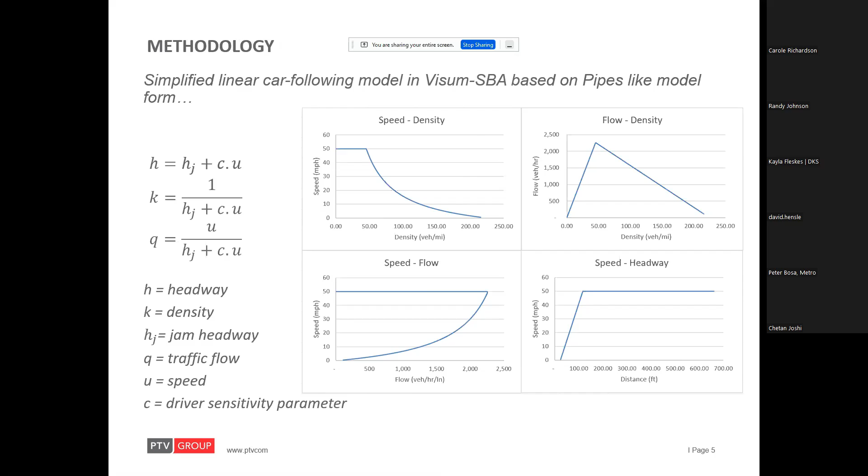Now with this Pipes model formulation, we have this property where the model basically has these kind of boundary conditions. In the congested regime, your Q critical is like Q max. So if we just solve for these boundary conditions in the prior form, we can directly get that driver sensitivity parameter C, where C is equal to 1 divided by QC, which in this case converges with Q max, and then the jam headway and free flow speed.

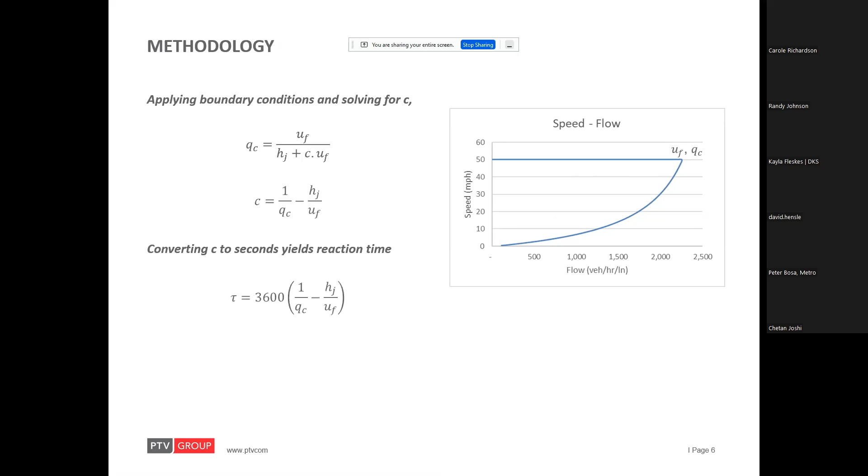So converting this C into seconds yields the reaction time directly, which is an input into the car following parameter. So tau gives you just basically a multiplier into 3600, and that gives you the reaction time input at the network level.

This would be entered, let's say if you're doing this in Visum, you'd enter this reaction time for a network level, and then you can further add a multiplier for specific links in the network if there are specific behaviors or calibrated behaviors observed over there.

So then the model calibration essentially requires 3 items: one is the free speed, one is the jam density, and then the capacity. And these are readily available, generally speaking, from your loop detector dump. So these can be utilized for calculating the reaction time, which goes into the car following model.

So here we had to create this application example. On US 26 Sunset, we have a nice corridor with different features or bottlenecks that can be used to test this car following model and its parameters and such.

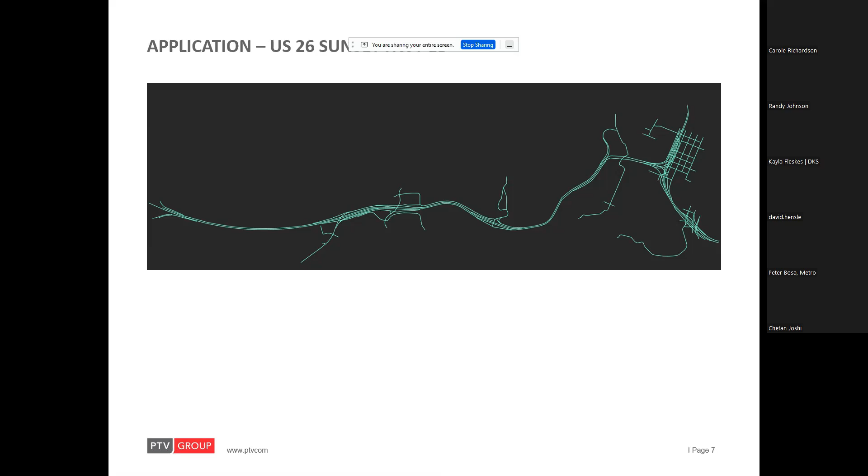We created a small network over here for the dynamic assignment. Over here, we have a set of general freeway links in the corridor, and then there's that Vista Ridge Tunnel bottleneck.

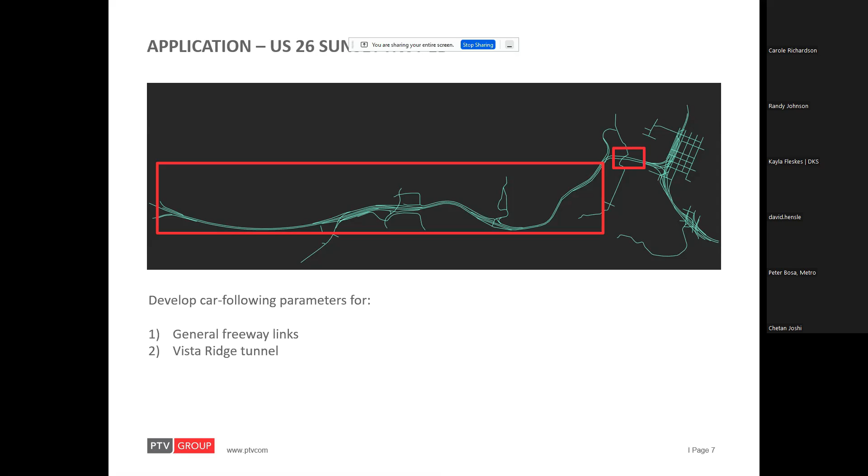So you're going to capture 2 types of behavior here. One is the general following behavior on the usual urban freeway type links, and then what happens upstream of that Vista Ridge Tunnel, which might be perceived as a certain bottleneck with that other complex geometry further downstream of it.

So I explored the state of Oregon ATR data, didn't have much luck in getting a detailed loop detector dump over there. This was just on public domain, so maybe that data is available if we put in a request at ODOT. But then we also looked at some transferability or how that would perform.

So then we had some loop detector dumps from I-4 Orlando, which is kind of an example of an urban freeway, and then the Holland Tunnel, which connects Lower Manhattan and Jersey City. That would be kind of like that tunnel type of bottleneck.

Now here, based on the prior equation that we had listed, the urban freeway links got a reaction time of 1.47 seconds, and then tunnel links came to 2.57 seconds. We entered this into the Visum SBA and looked at how the queuing could be simulated on the Sunset eastbound.

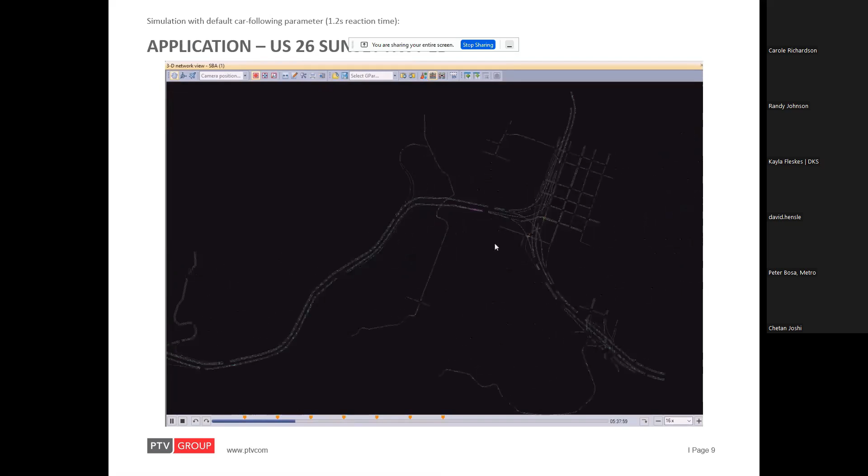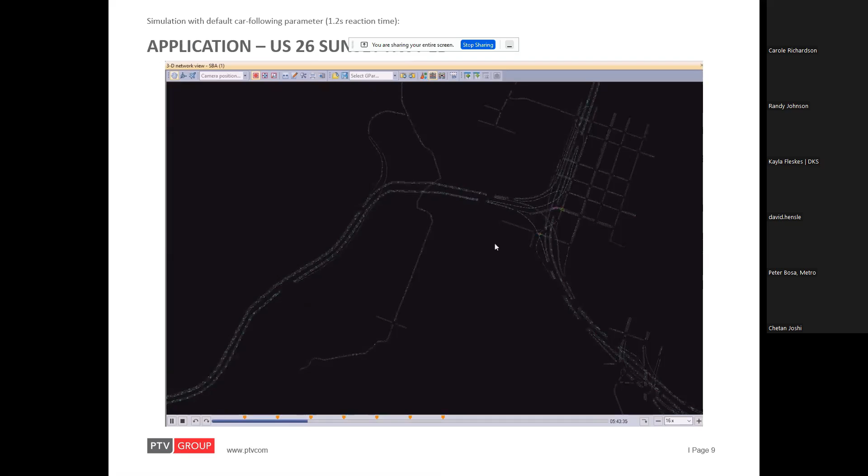And we will look at some travel time segments and come to that a little bit later in this presentation. But you can see that bottleneck is represented, but it's not causing a huge problem because it's all on the default reaction time, which gives it plenty of capacity to pass through.

So next we plug in just the urban freeway parameters, which is the 1.47 reaction time, and simulate that. And over here, you can immediately see in that corner, again, near the Vista Ridge Tunnel, that there are more shock waves going back in the pink, and it travels further back as we look at it. Over here, you can see that shock wave is a lot more pronounced in this case, and you can see it visually traveling back with the updated car following parameters for that reaction time.

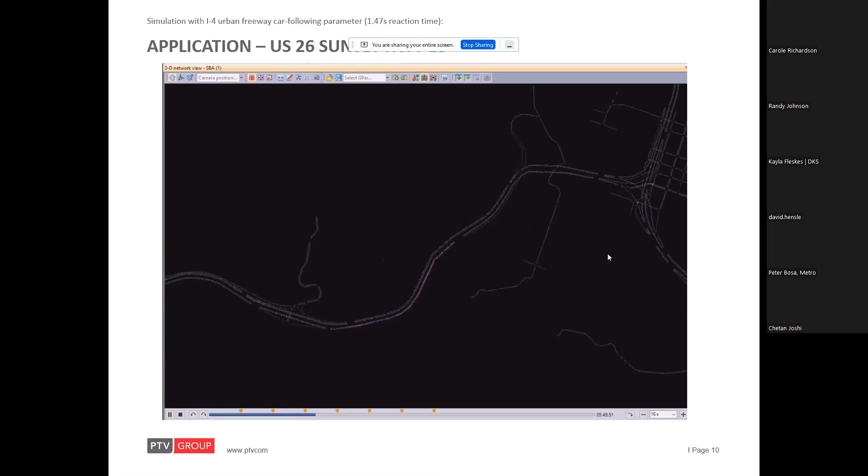So it gives you an idea of how the shock wave flows back just with the change of one parameter over here, and you can see that propagating all the way back into traffic. Gives you an idea of where the bottleneck starts and how those bottlenecks propagate backwards.

Then in the third case, we added the Vista Ridge Tunnel bottleneck function along with the urban freeway. Now you can see that a lot of the flow gets metered going into that Vista Ridge bottleneck, and the pink congestion portion starts at a different point. If you have driven that segment, you may have noticed you drive through some congestion, and once you get near the tunnel, you kind of get into a metered stream which gets you through into your merge sections relatively without that much stop and go, depending on the day. But a lot of the bottleneck over here, the shock wave propagates a lot further back, and the impact of that shock wave can be seen stretching much further back.

So this kind of gave reasonable visual confirmation that it's probably not that great to use just the default. So you want to use some level of local calibration, as Randy had mentioned earlier as well. And then we take a look at travel time segments and such, and how those compare with these different parameters.

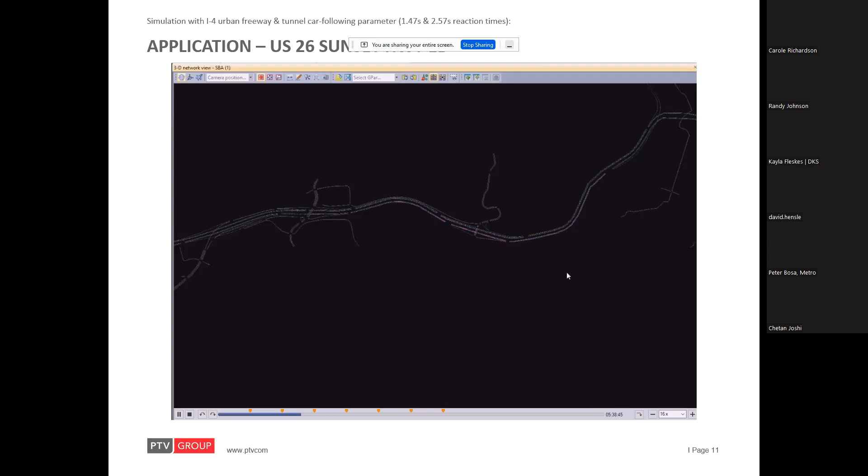One thing to mention, there are some routing artifacts that occur on that section of Sunset, where some travelers choose to take a small alternative detour to get back onto their I-405 South section. So here, this would be the usual route one would take in free traffic. But in the congested stream, we saw this with both the updated urban freeway and the urban freeway plus tunnel bottleneck parameters, that this other route starts getting captured. So this gives you that little variation of routing that can occur.

Of course, the proportionality is still largely on the primary route, but that other route becomes attractive when conditions are more saturated, and in cases where vehicles are not able to merge into the correct lane. So they take a detour and get back on track over there.

Now, to validate some of the travel time segments, again, I checked the information on 511 trip check segments. Couldn't quite extract data from it, so probably just something I don't know how to do with the 511 website. Need better understanding of it.

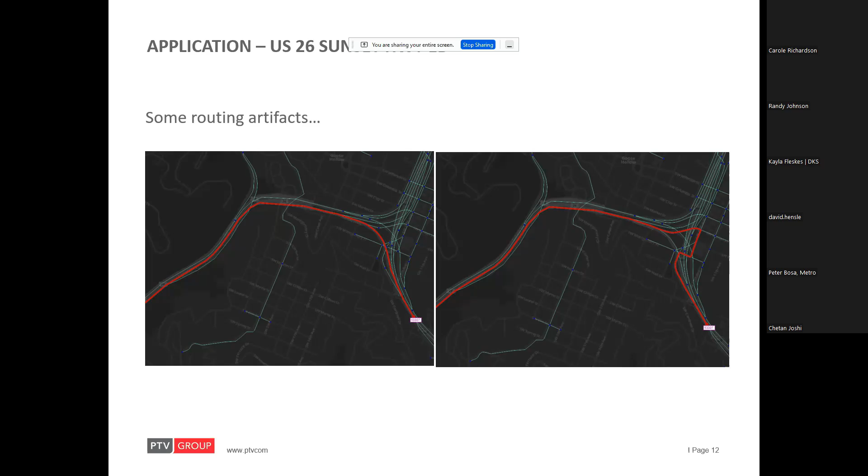But then we have Google routing, and nowadays you can give a departure time setting in Google and get sort of an expected range of travel times you might obtain if you depart at a certain timestamp. So we were looking at this evening peak, 5:45 p.m. departure, let's say, and then comparing that travel time segment with what we got in the Visum SBA with default parameters, with a parameter, and then two parameters with the tunnel as well. We looked at three segments here: one going straight into Market Street, one going north, and one going south, and this is the general range of travel time obtained.

So how does this compare with what we got through the model? This is the kind of result here. For Market Street, with default, it basically just gives you a free flow travel time on the congested segment. So not much is captured with the default parameters if the simulation is done as is. With adding the urban freeway, now you can see a little bit more congestion, and the travel time comes at least within the range. And then with the additional tunnel bottleneck modeled, travel time is further congested. This general trend can be seen on all three segments that we look at over here.

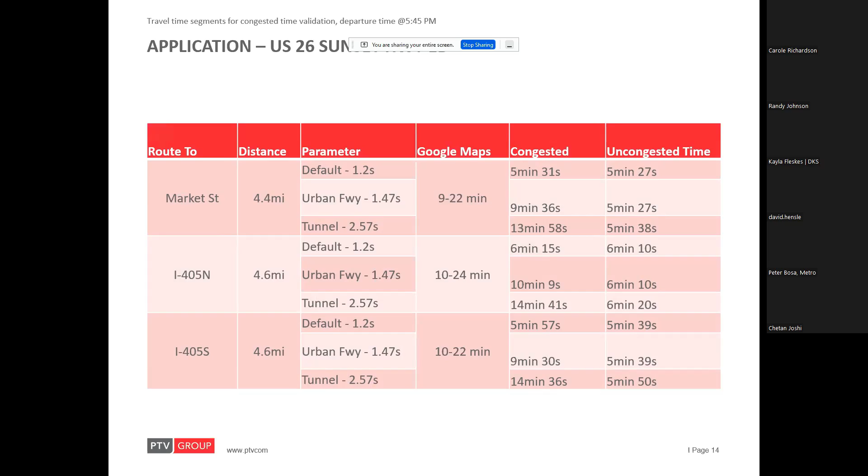So definitely, our conclusion from that is that it is better to evaluate and consider car-following parameters instead of simply using defaults, where there is some data available that will give you a more realistic representation of congestion and be able to model bottlenecks a little more accurately in terms of where they originate, instead of tweaking individual intersection capacities and such. Functional and available loop detector data, ATR data, can provide quite useful information for model calibration for these driving behavior parameters.

On the ability to transfer coefficients of parameters, this was just one case, and because we had travel time more in ranges, it was hard to conclude anything from that observation. So some more use cases and examples will need to be evaluated before we can say anything definitive about the transferability of those parameters.